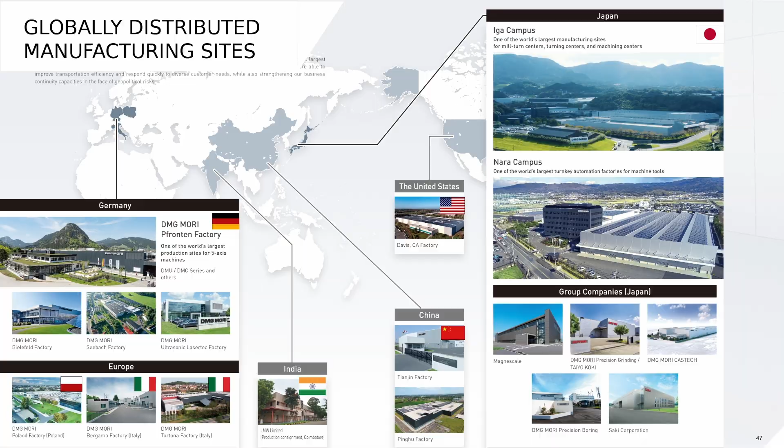I truly believe that U.S. manufacturing is coming back, so maybe we need to make one more factory. Mark Moore recommended me to make it nearby in Illinois state, just in between Hoffman Estates and Rockford or something like that.

There is huge potential that we are going to make one more factory in the United States.

We have 2 factories in China, and we used to have one factory in Russia, but it was occupied by Mr. Putin about 2 years ago. And we just got the insurance from the German government to cover that loss. But anyhow...

That means big countries like the United States, China, or even Russia, no more. But we have to be an insider, and we have to make something good in this domestic place. As for the tariff issues, 15%, Japanese machines used to be 0 tariffs, and German machines are 4%.

15% tariffs sound very tough for us and for the customer, but the reality is that if we are selling a 1 million dollar set of machine tools to one particular customer, the machine's imported value from Germany or Japan is something like $600,000. We make all the engineering, software, cutting tools, work holdings and peripherals procured and manufactured in the United States. So even though it's 15% tariffs, the real cost increase is only 8 to maximum 9%, and we can share that or ask the customer to pay, or give additional warranties instead. So this is very important. Look back about 20 years ago, our company at that time was big, but now

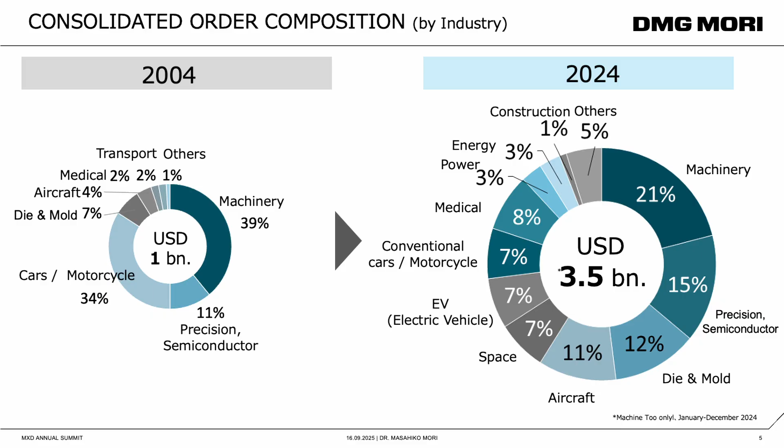Medical was only 2% about 20 years ago, but now it's becoming 8%. Aging societies give us a lot of demand for making joints. And US leading companies such as JJ are taking the leading role in making those kinds of things all over the world.

For instance, their Ireland factory is now becoming fully occupied, so they are now making a new factory in Costa Rica. The Costa Rica government is inviting medical type businesses, so we just set up a 3 person company in Costa Rica to handle installation and service there. It's a very nice place for surfing too, facing both the Pacific and Atlantic oceans. So this is very, very important.

Why can we do this? Some machine tool builders are still struggling, only making machines for automotive combustion engines and depending too much on the Asian market, especially China. So their orders are at zero over there. So it is very important to make very flexible, software-driven machines.

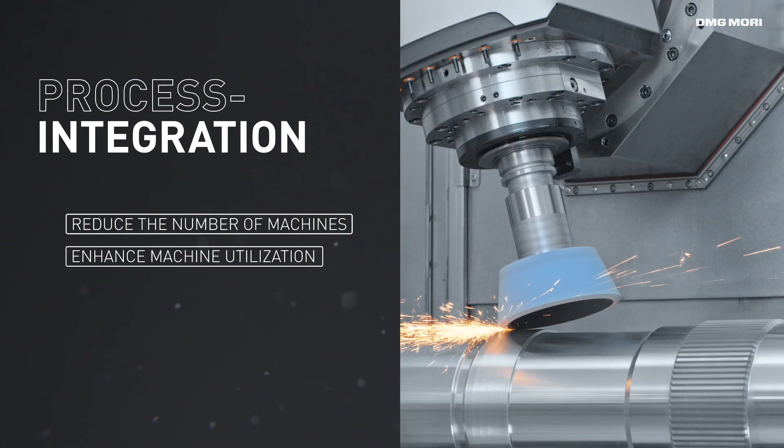So we are now talking about machining transformations, MX. Let's see some image videos. What is machining transformation? As I said, very robust and high-speed 5-axis or mill turn machines can pack turning and milling, measurement, grinding, or sometimes heat treatment into one machine. So we can eliminate 20, 30 year old special purpose machines with very new 5-axis or mill turn technologies. You can make gears, turbines, or any kind of things.

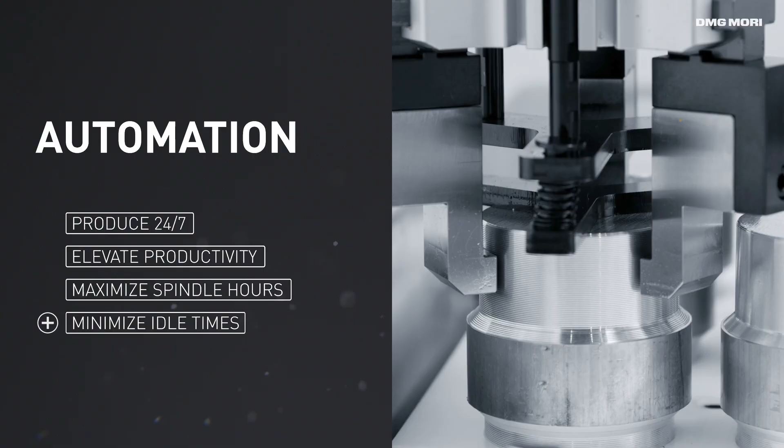By doing this, the process speed becomes a little longer because we do everything, but that's good for automation. If you have 5 machines with separated processes, you need 5 robots in front of the machines. But if you pack the entire process into one machine, you need only one robot or pallet changing system. But in order to achieve that, we need complete digital twin technologies, otherwise you cannot simulate or program those kinds of things.

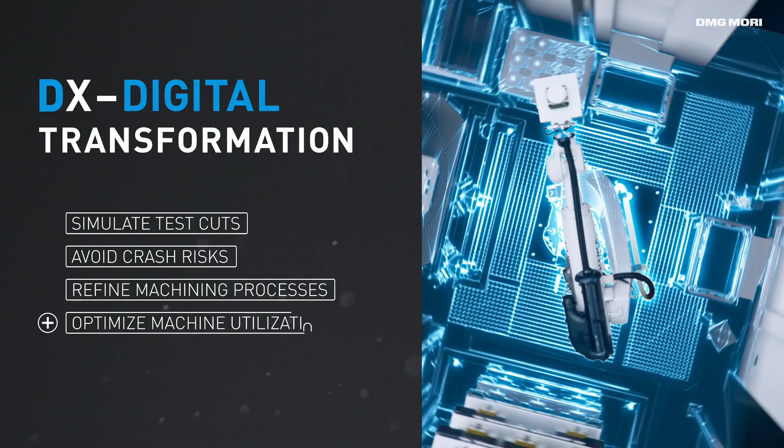So in short, everybody talks about having to do something with DX, but DX is just a tool. Without DX or digital technologies, we cannot make anything realized. So process integration comes first.

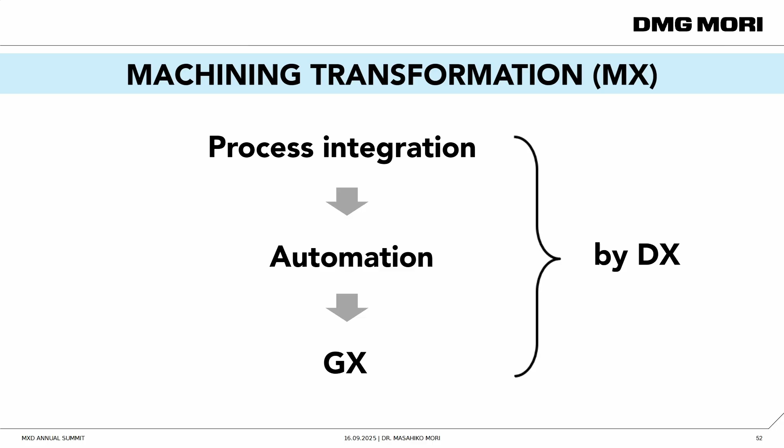20 years ago, the movement of 5-axis or mill turn machines wasn't so flexible because the CPU power, memories, or 5G weren't available. We clearly remember about 20 years ago, if you were making a die and mold, the big 5-axis machine would sometimes stop - they couldn't accept the huge data from the CAD system or CAM programming. But now, the machine is waiting: give me more data, I can move faster.

Then automation - one of the most slavery jobs in the factory is just putting raw materials into the machines and taking them out. In the old automotive way of manufacturing, you had to do it in a takt, a very fixed rhythm, so people were very tired after one shift. Now we can automate, or we have to automate, all such lazy or unattractive jobs in the factories, and make the factory more attractive for people. The most important thing is, by doing this, we can minimize the net working capital, the work in progress in the factory.

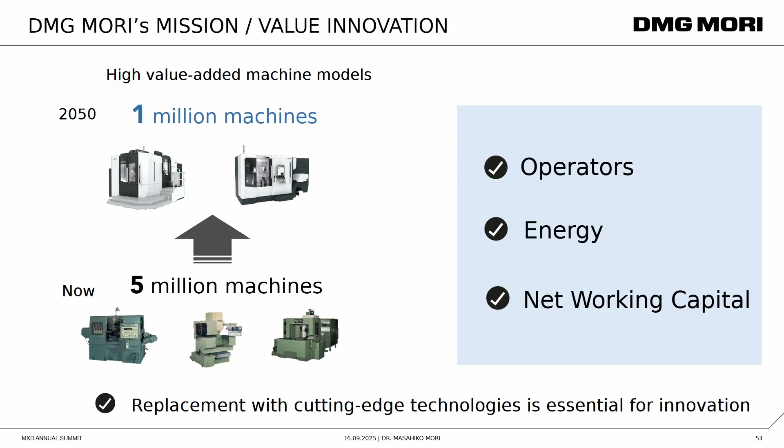So this is what we are thinking, machining transformations. I have been working very closely with Siemens. We are the largest Siemens CNC user. We're always buying about 100 million euros of CNC systems, including power cabinets, from Siemens. About 50 million US dollars from FANUC, 40 million from Heidenhain, 30 million from Mitsubishi Electric, and about 10 million from Beckhoff. So all 5 major CNC producers are our friends and cooperative companies.

With our figures, our market share is not growing so much, always globally 3 to 5% or something. In the United States or in Japan, really over 10%. In the European countries it's a little bit better, about average 25%.

I strongly believe there are about 5 million machine tools with some proper controls existing in the world, and half of them have 2 big issues. Half of them are already 20-plus years old, becoming very old. Imagine 20 years ago, no iPhone, and computers were so slow. Those kinds of things still keep running the machines. Yeah, it's robust, but not good for new technologies, precision, and so on.

And the other thing is accuracy type of issues. But with this 5 million machine tools, I'm quite confident that we can integrate 5 machines into one package, for speed and flexibility and those kinds of things. So our mission, or any machine tool builder's mission, is to reduce these 5 million machines to 1 million. By doing this, we can reduce the number of operators.

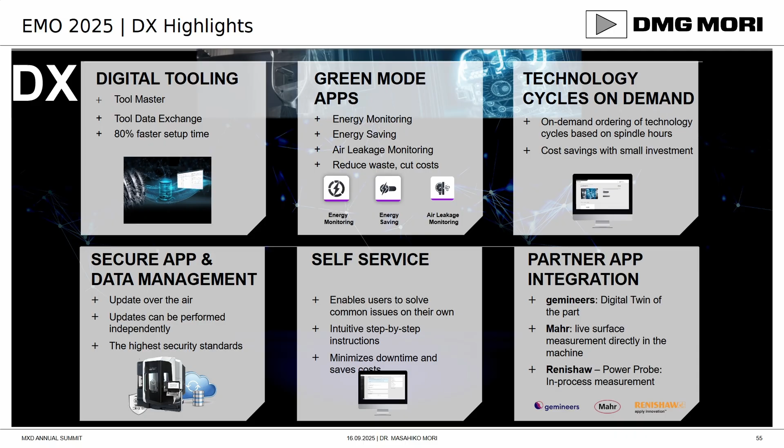Huge opportunity for us, the security is very important, but I strongly believe that the US military sections and government sections will define some of the security measures for connectivity and so on. Governmental guidance for those kind of things is very, very important. Think about it, the internet started with a military system, originally MIT in the 1950s, and original CNC machines were supported by DARPA, the US government foundation. So that kind of security is keenly needed.

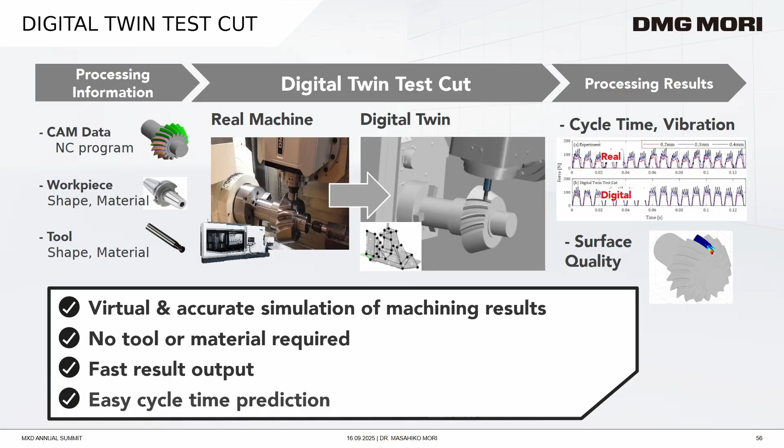We are very happy implementing the digital twin test cut with this. As a machine tool data company, we have all the data of the machines, and we have the CAM data working together with Mastercam or Esprit or NX and so on. The customer brings their workpiece data and materials to our cutting research center, and we work with tool companies, a special tool company from Germany, American Kennametal, or other very nice small to large companies. With a digital twin test cut and doing the real test cut, we've been doing this about 100 to 150 digital twin test cuts and real test cuts every month. They're becoming more and more intelligent.

Okay, and the next one. So in order to make it more speedy, at this moment we are using Fugaku. Maybe you are not familiar, but up until 2 years ago this was the fastest supercomputer in the world, now becoming number 3, something like that. But I'm very excited that the state of Illinois may make a huge investment in quantum computing, and then we want to be a partial user for that.

You can see the complete difference. A normal workstation, typical big dies for Tesla or Toyota motor car bodies, takes a real process 8 hours, but to make a very precise test cut on normal workstations in a digital twin takes almost 60 hours. With this supercomputer, it's 0.2 hours, and maybe with quantum computing only 1 second, 2 seconds, or something like that. So the productivity of the digital twins is becoming much, much more faster, productive. Very exciting. So next one, please.

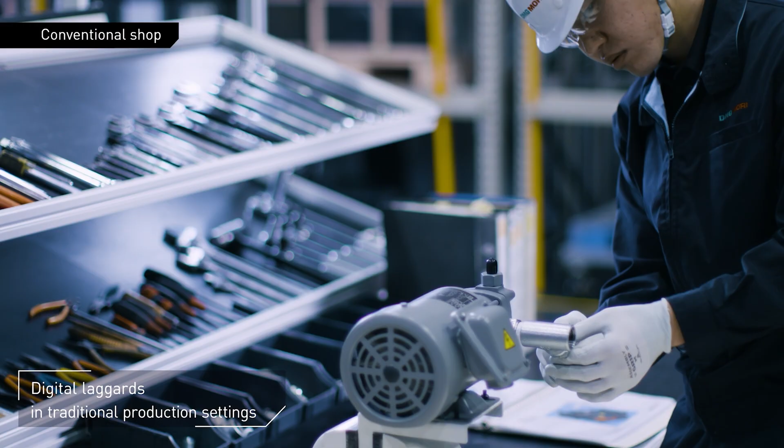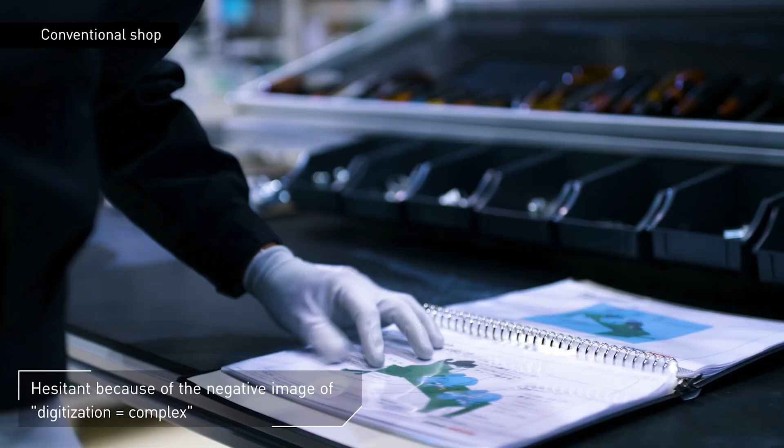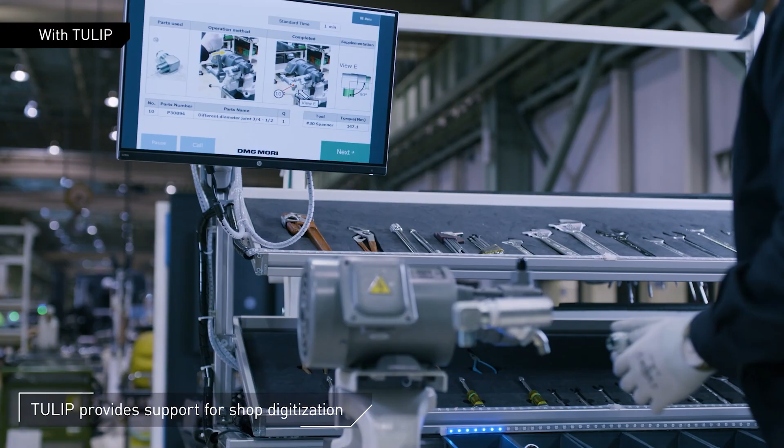There are varieties of shop issues that block productivity improvements. Still, many shops use paperwork. Tulip tackles those problems and provides full support to ensure efficient production through shop digitization. Some of you may be hesitant to adopt digitization because of the negative image that preparation and management are too complex, but Tulip is the optimal solution. It supports your shop digitization in a simple and smart manner, and installation is very easy, so no special equipment or change to the current shop environment is necessary.

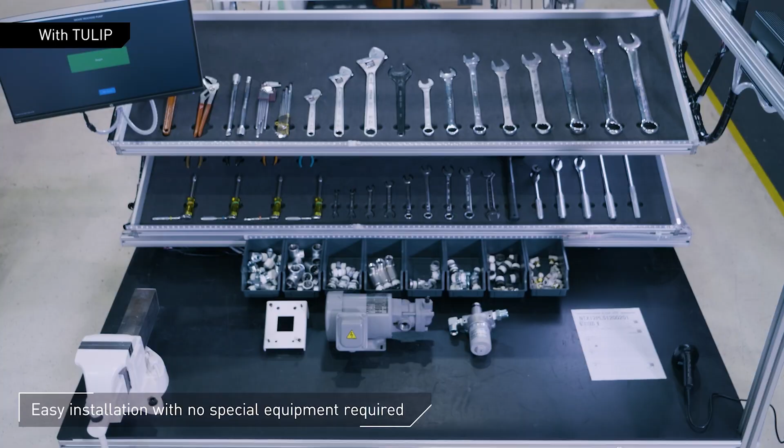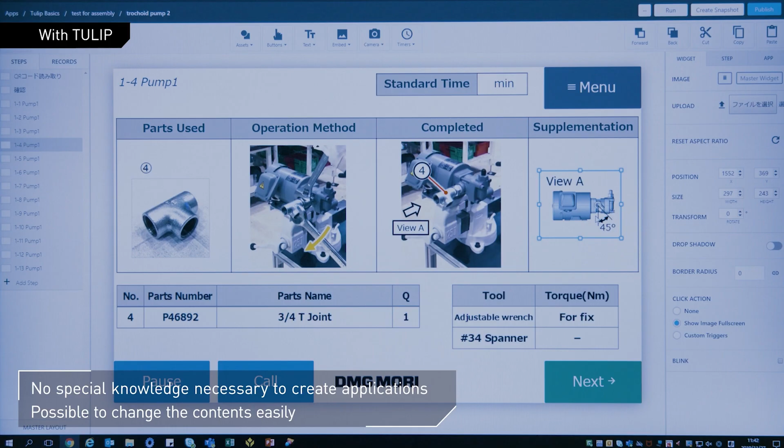You can create operation instructions as well as various applications with no special programming knowledge, and the contents can be changed flexibly. The applications can be deployed to production sites immediately via the cloud. As information is shared in a timely manner, it enables you to promptly respond.

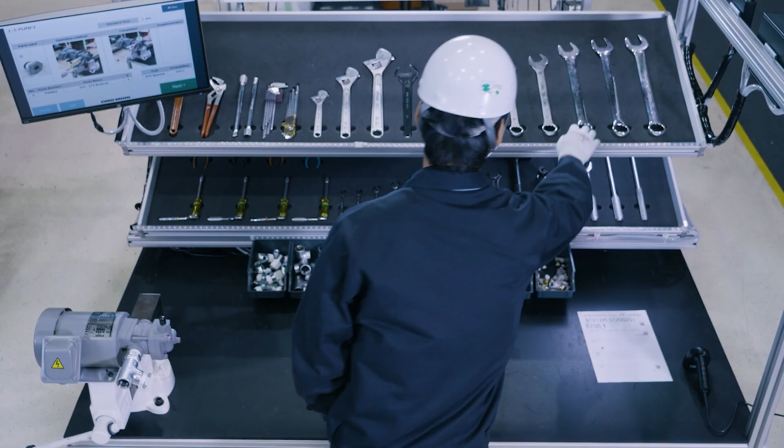So you will have a demonstration in these types. Also, we already connected about 10,000 machines in Japan, the US, and Germany for monitoring 24 hours, 365 days. We call it a condition agent.

This is a preventive maintenance or prediction system for machine failures. We're already quite confident that for spindle or ball screw type failures, we can detect 100% about one to two weeks before the failure, thanks to today's cloud systems, very high power computing systems, and nice sensors.

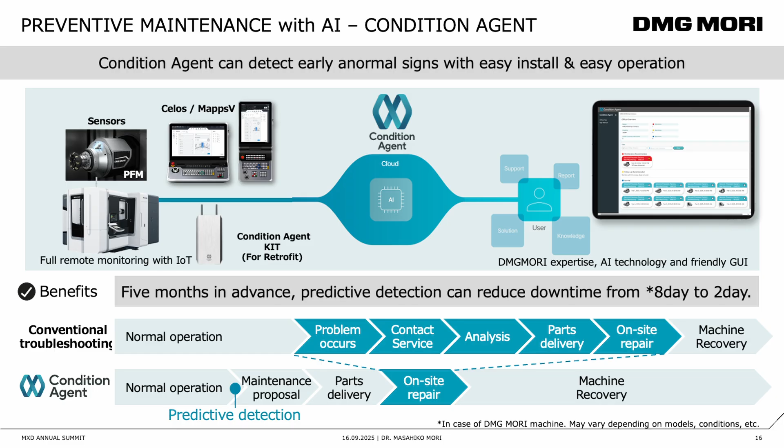We need more security here, but by doing this we address the problem that, worldwide, there are 5 million machine tools, and the average usage of the machines is only about 1,000 to 1,500 hours a year. Theoretically, the most profitable machine shops and factories run the machine at least 20 hours a day, 300 days a year, which means 6,000 hours.

Well, we don't have to run 6,000 hours, but if you properly run the machines at least 3,000 to 4,000 hours, your cost per second and minute becomes much cheaper, even if you buy very expensive machines from us. I'm quite confident of that.

So our mission is to keep running the machines as long as possible without major breakage or stops, and also to keep them running longer—day and night, weekends, even vacation time—through the use of automation.

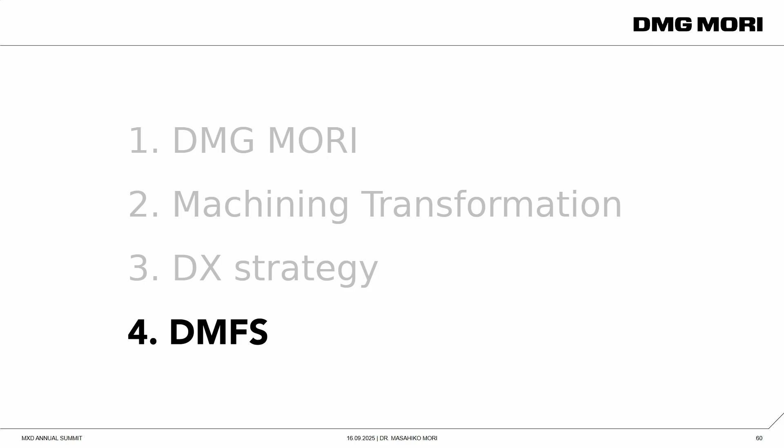DMG MORI's U.S. government business—Navy, Department of Energy, Army, Air Force, and national laboratories such as Oak Ridge or Lawrence—is very important for us.

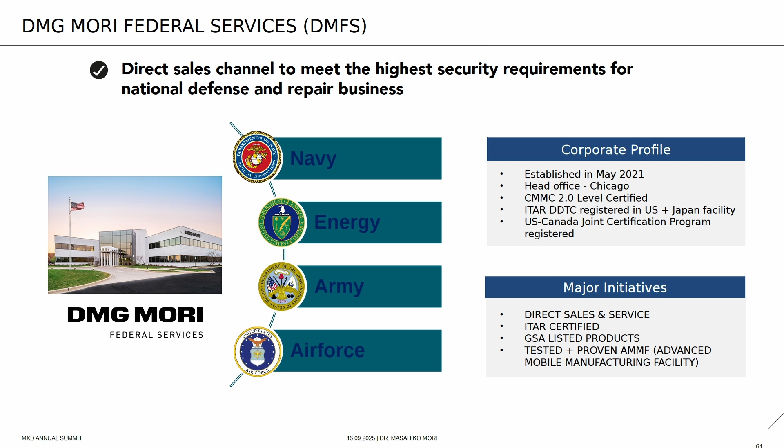Unfortunately, we are a Japanese and German manufacturer, so I cannot be a U.S. citizen, because if I move my citizenship here I'd have to pay a huge tax to the Japanese government, and vice versa. Anyhow, we have a very close relationship with the three countries.

So we decided, with Mr. Jim Nudo and Mr. Mark Moore, both 4th generation American citizens with all clearances and so on, to create a special purpose company working together with those kinds of governmental divisions. This is growing quite successfully.

We know how to prepare all the documentation and how to secure all the digital connectivity and so on. I'm also very proud that as a machine tool and mechanical company, we have a special purpose ITAR-certified factory in Japan, in our own factories, and we've already started several projects there.

By doing so, of course, we only have 1,000 people in the United States, so the number of application engineers sometimes fills up. So we can use Japanese security-cleared engineers to support U.S. ITAR-related customers to do test cuts and manufacturing, those kinds of things.